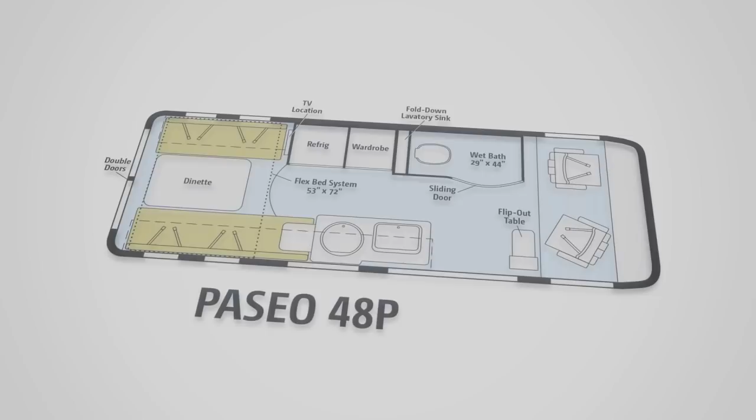Question 1: Will it meet my needs? Seems obvious, right? A motorhome should meet your needs. To make sure that it does, it's important to find a floor plan that works well with the way you'll be using your motorhome. That's why we offer floor plans ranging from ultra-efficient compact coaches to luxurious double-bath diesel pushers and everything in between. Floor plans are like a blueprint for a house, showing key areas including the kitchen, bathroom, bedroom, and living areas.

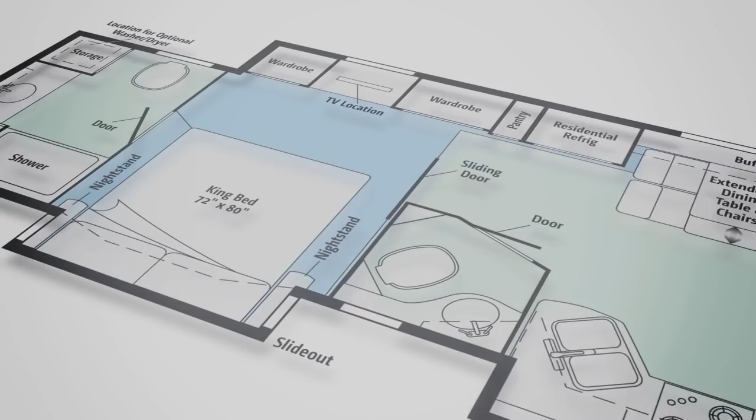When looking at floor plans, it's important to think about storage. Storage makes RVing even more enjoyable, especially when it's easily accessible. For example, a compartment by the entrance door is prime real estate, perfect for lawn chairs, umbrellas, sports equipment, or anything else you use outdoors. Whoever thought of putting the batteries in this particular storage compartment certainly wasn't thinking like an RVer.

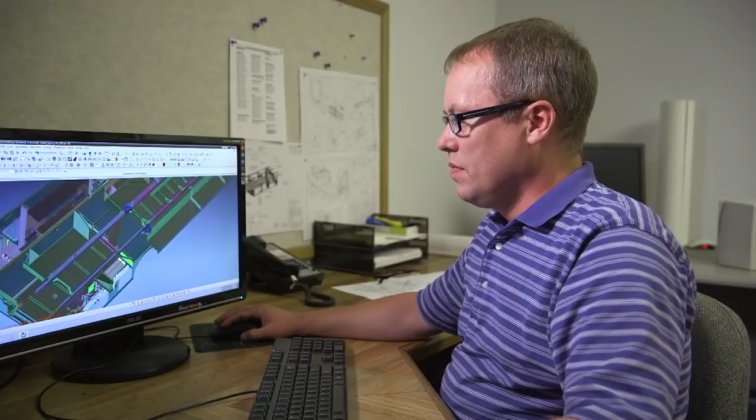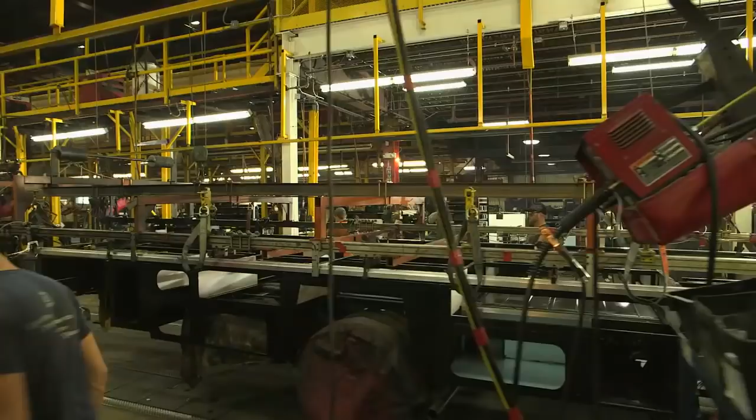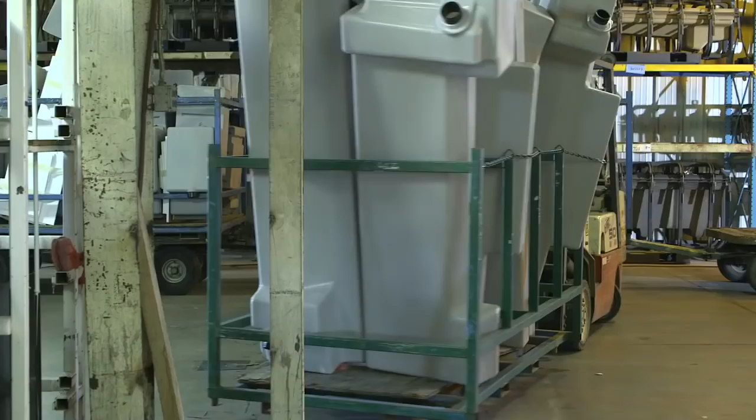There can be big differences in storage even when two coaches are the same size, depending on the engineering and manufacturing skill of the company behind them. Our engineers have real advantages when it comes to conjuring up every last cubic inch of storage in our floor plans. First, we work closely with the best chassis builders in the business to make sure the chassis under our motorhomes deliver the power, strength, durability, safety, and space required for each specific application. Second, we make our own holding tanks, so they fit precisely and free up surrounding space for additional storage. That's impossible with the off-the-shelf rectangular tanks other manufacturers use.

Our engineers also work hard to efficiently package systems and components. They use a state-of-the-art computer-aided design system to ensure a precise fit for all components and reduce wasted space. We call it Smart Space Design, and it's one reason our motorhomes seem to live much bigger than similarly sized competitive units. A sofa arm may actually hold a table, while our pantry opens to reveal vertical storage, then opens again to reveal spacious shelves and drawers. The space we save adds to your living or storage space.

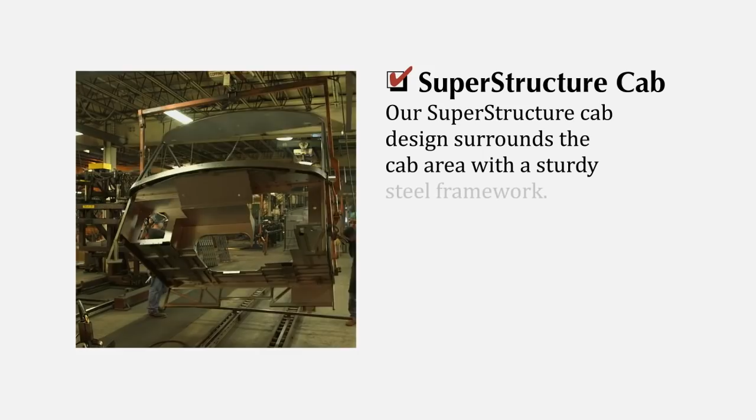When deciding whether a motorhome meets your needs, there's another important factor to consider: safety. Your safety is the number one reason we put so much care into the design and construction of our motorhomes, and why we put them through such extensive testing. In addition to meeting or exceeding all federal and industry standards, our coaches employ a host of other safety features. Our superstructure cab design surrounds the cab area with a sturdy steel framework. We use 3-point safety harnesses in all driver and co-pilot seat applications.

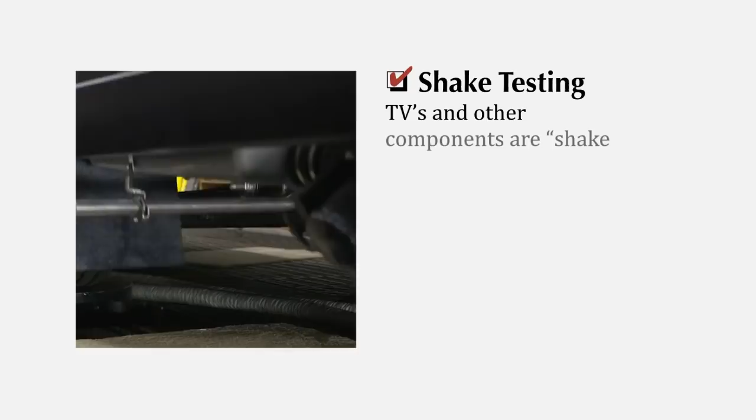Exterior mirror locations are designed to ensure optimal viewing angles. Side view cameras, available on most models, offer added comfort in backing and maneuvering by eliminating blind spots. TVs and other components are shake tested to ensure they and their mounting hardware will stand up to road vibrations. Windshields are installed automotive style with urethane. Forward-facing dinette seats feature child seat tether anchors. Appliances and cabinets are mounted to steel embedded in sidewalls.

So now that you've narrowed down your favorite floor plan, it's time to ask question number 2: Is it built to last? At Winnebago Industries, we've spent more than half a century developing the engineering and manufacturing expertise to produce reliable, durable, quality motorhomes that represent real and lasting value for our owners.

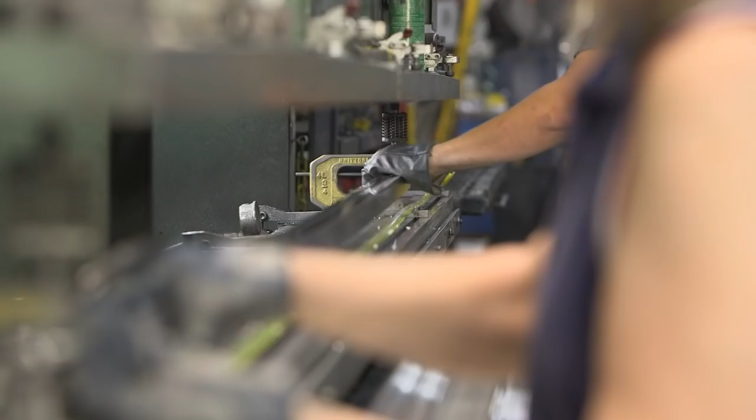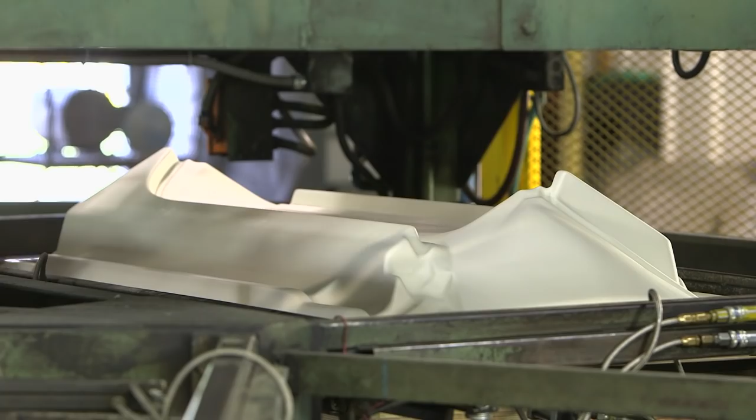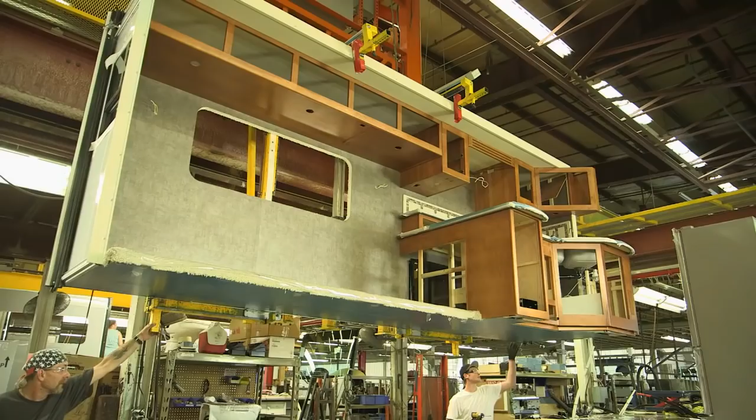Unlike companies that simply assemble their motorhomes from off-the-shelf parts, we build ours start to finish, and we manufacture a large proportion of our own components, so we can control quality, offer part replacement for years to come, and design parts for each specific floor plan. We also use our expertise to create the systems and components that go into a modern motorhome: the structural framework, walls, cabinetry, furniture, electrical and plumbing systems, and more.

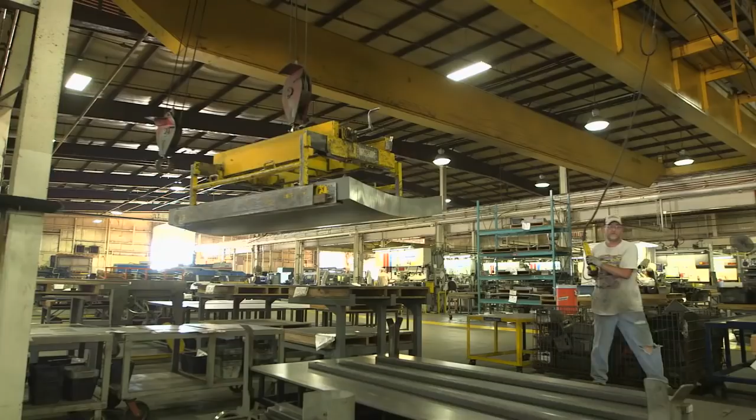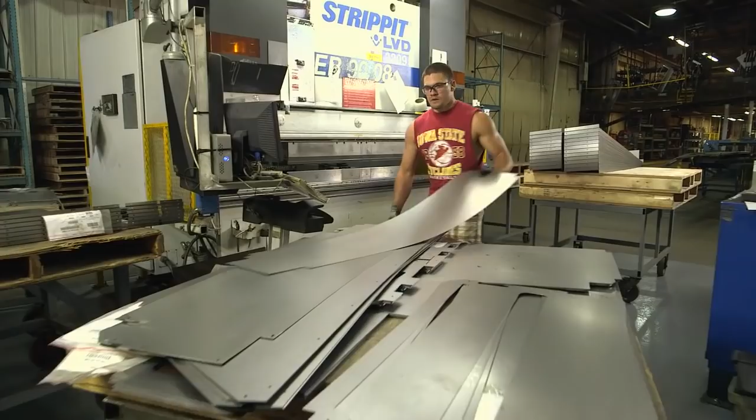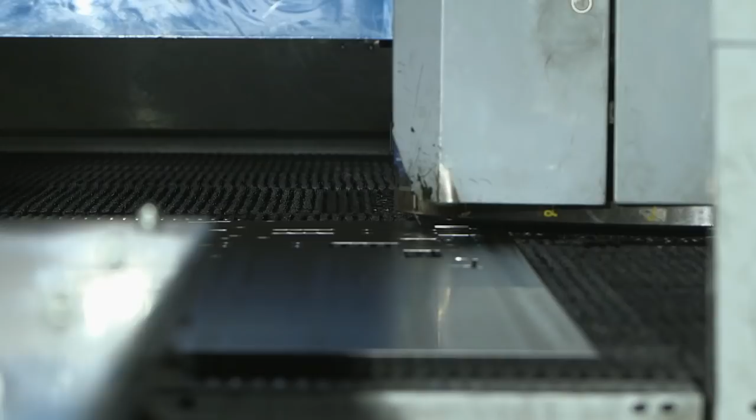Let's start with the framework, and that of course means steel and aluminum. No other manufacturer can match our expertise in manufacturing critical steel and aluminum components. Larger than two full-size football fields, our dedicated steel working facility processes sheet, tube, and roll stock steel. This giant building houses a vast array of computer-controlled equipment, huge machines that manufacture parts to tiny tolerances, precision you just can't get with other methods.

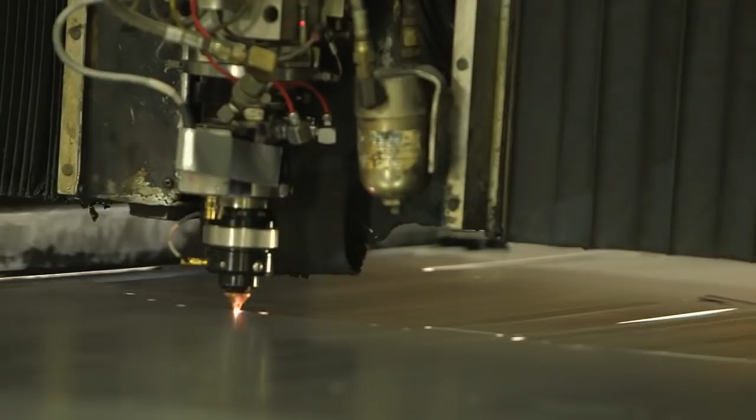We use high-tech lasers, laser tube cutters, turret punching centers, and robotic welders to make precise parts for our motorhomes. Plus, because of the efficiency of these machines, we are able to reduce waste and cost. Ultimately, much of this steel will be cut, shaped, and welded into part of our trademark metal superstructure that surrounds the driver and passenger with steel.

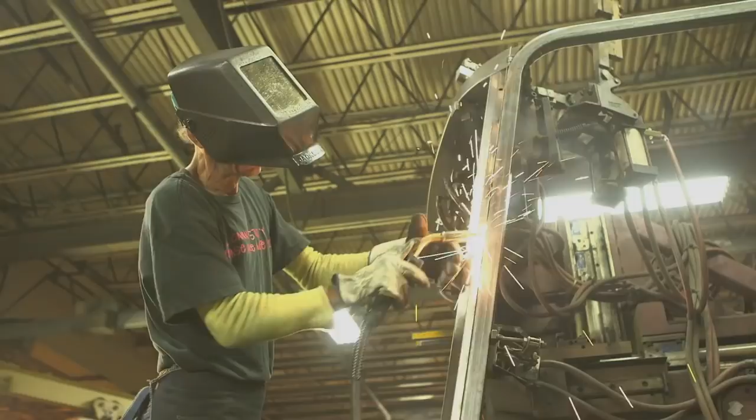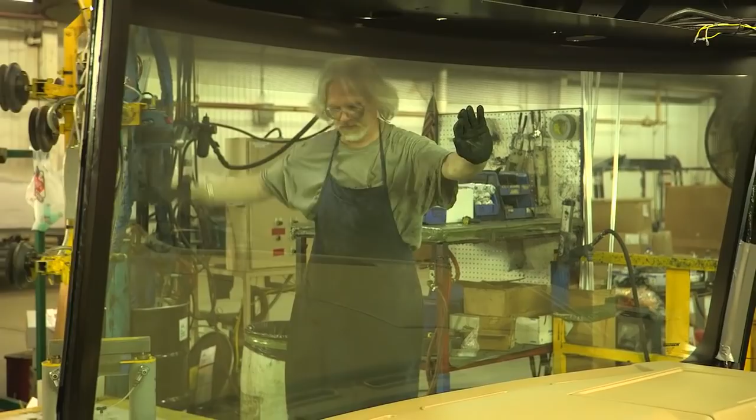Others use a rubber gasket to attach the windshield to the fiberglass front cap. For safety and durability reasons, the rubber gasket was dropped by the auto industry decades ago.

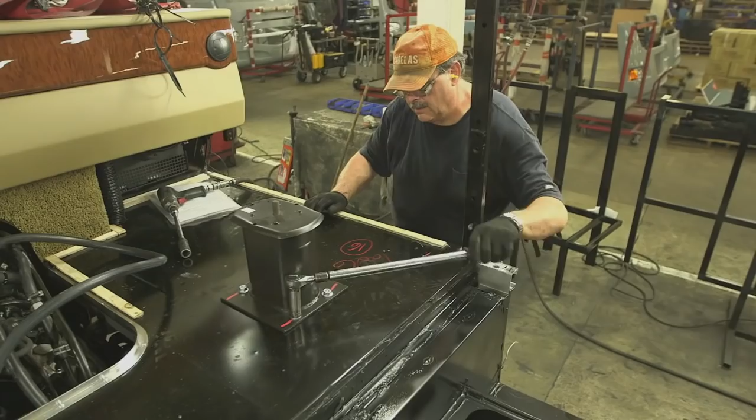Our motorhomes feature a steel firewall between the engine and passenger compartments. And as hard to believe as this is, other companies use wood in this critical application. We also securely bolt our driver and passenger seat pedestals in solid steel, whereas some competitors mount their seat pedestals to a wood cab deck.

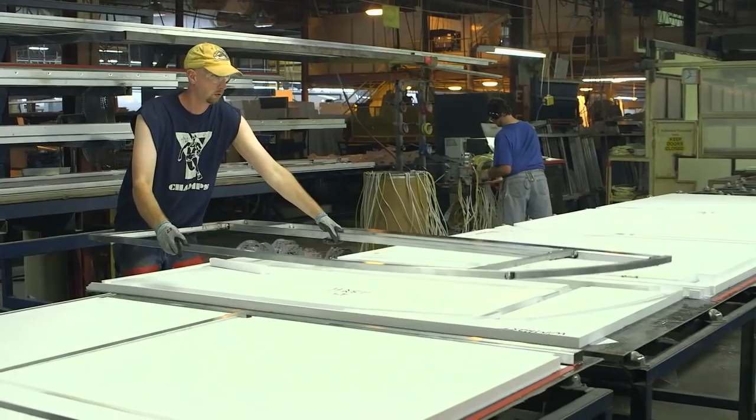Our trademark superstructure includes the aluminum framework embedded in our motorhome walls and roof. And as you can probably guess by now, we don't buy that framework, we build it. Some components are powder-coated.

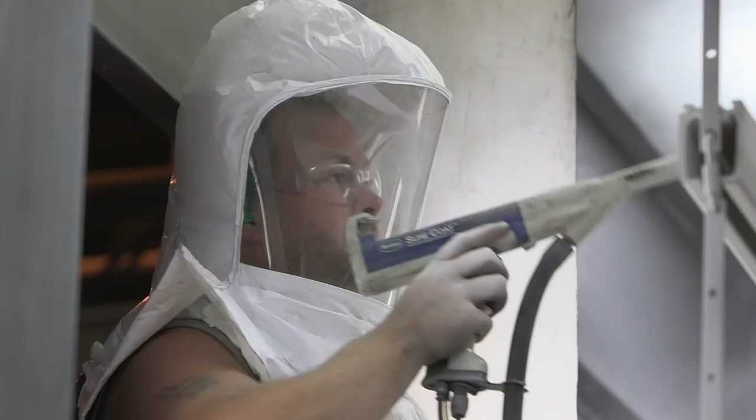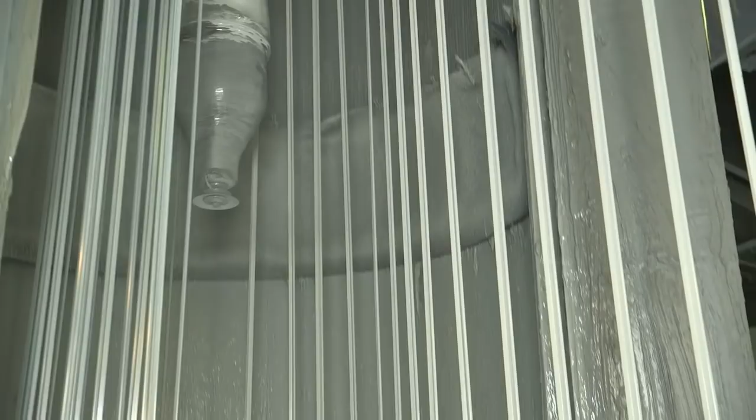Here, a positive electric charge is applied to the part, which attracts the negatively charged powder particles. The coating is then baked on for an attractive, extremely durable finish. Other aluminum parts are sent to our vertical paint system, which applies a heat-treated finish with a revolving spray head to ensure consistent coverage with no sags, runs, or uncoated areas.

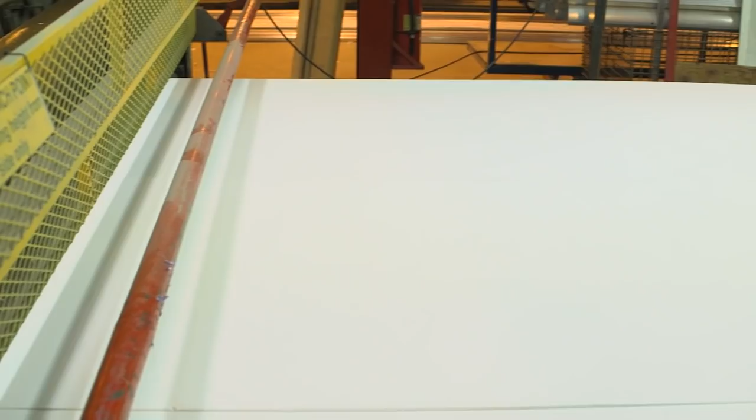The aluminum framework in our walls is a key part of our thermo panel construction, which revolutionized the industry by sandwiching the framework, ducting, and insulation between the interior and exterior walls. Today, we continue to advance our thermo panel technology while others try to copy it.

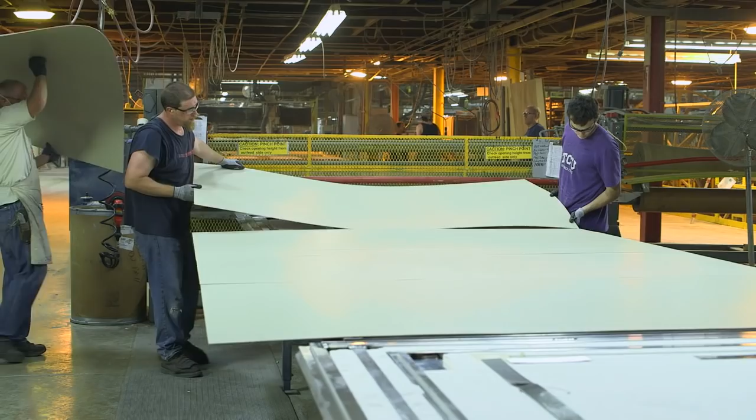Once the wall and roof is built, computer-controlled routers create precise window and door openings, plus channels for the wiring and superstructure. Others use less accurate handheld routers to cut channels, windows, and doors, which can lead to gaps in insulation, weak seals, and poor durability.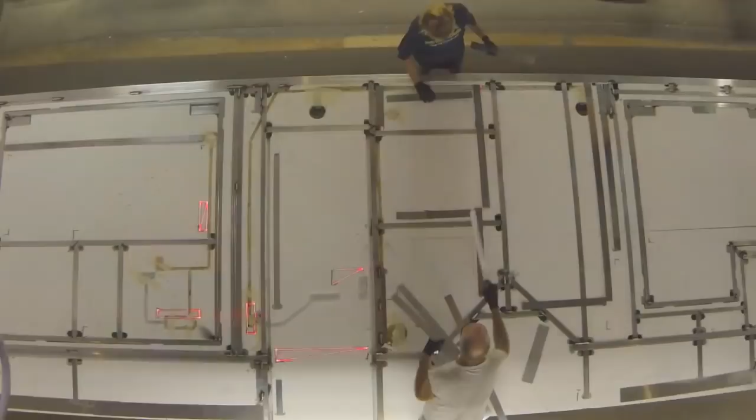Our laser projection system ensures correct alignment and placement of the steel panels mounted in the sidewall to serve as attachment points to securely mount cabinets and appliances. Other manufacturers mount cabinets and appliances to cheap pine wood boards placed inside the sidewalls, or even screw their appliances directly to the sidewall. Which would you rather have? Your cabinets and appliances mounted to steel or mounted to wood?

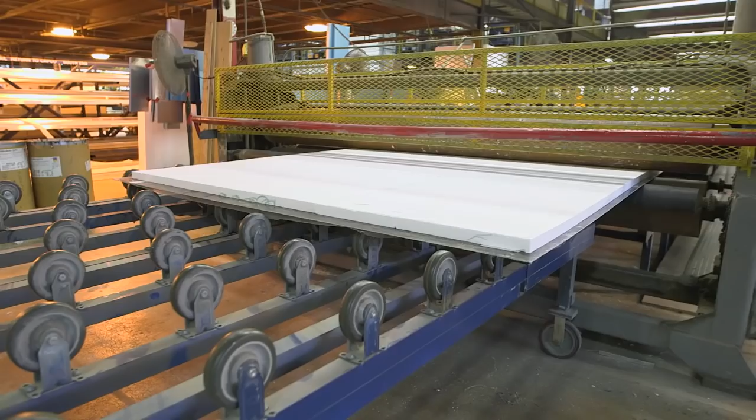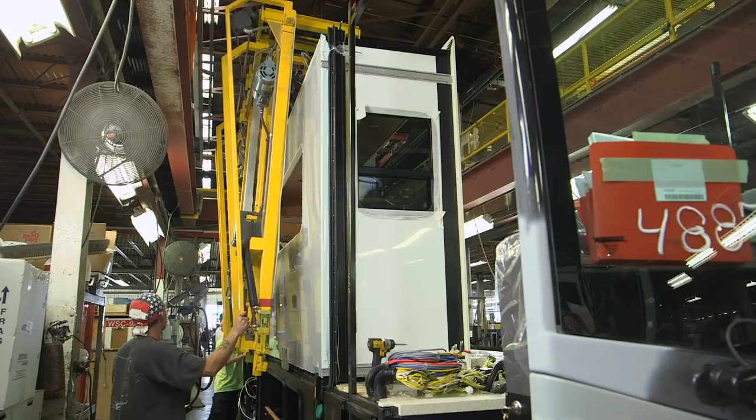We use calibrated pressure rollers and advanced adhesives to combine high-gloss exterior fiberglass, a welded aluminum support structure, high-density foam insulation, and a finished interior wall into lightweight, durable, and incredibly strong sidewalls and roofs. Other manufacturers use cheaper vacuum-powered systems to apply less precise pressure, which results in uneven bonding, reduced durability, and weaker support.

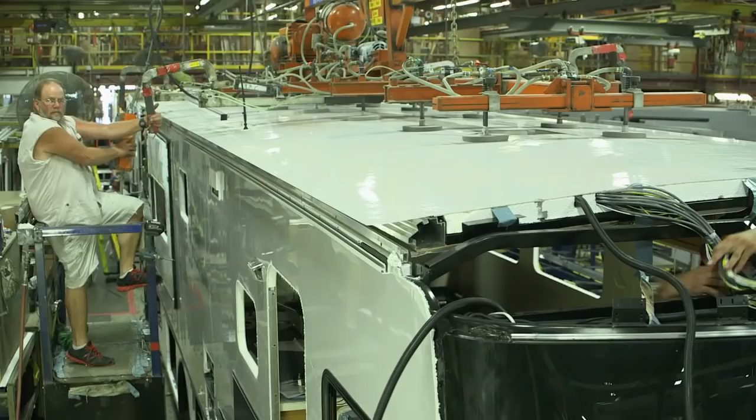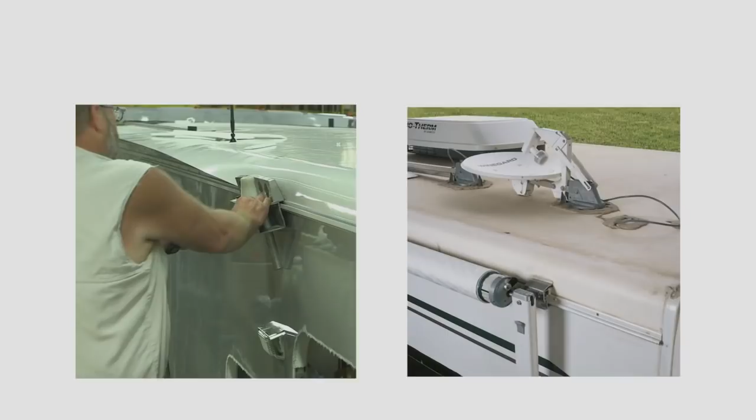To attach the roof to the sidewalls and the sidewalls to the floor, we use a specially designed interlocking joint to evenly distribute the weight along the entire span. That makes our empty shell so strong, it doesn't need internal reinforcement. Other brands simply screw their sidewalls and roof together. But with all the weight borne only by those screws, the resulting structure is so weak it requires interior walls and cabinets for stability. Which do you think holds up better over the long haul?

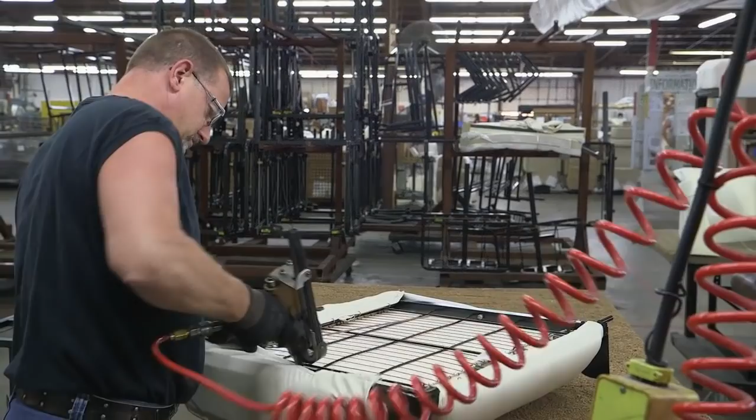Now that the walls and roof are on, let's talk about what goes in, on, and around them, starting with furniture and cabinetry. Unlike residential furniture, motorhome furniture must meet a unique set of automotive fire, crash, and other safety standards. And no one knows more about motorhome furniture than Winnebago Industries. Since our founding, the craftsmen in our Stitchcraft division have produced more than 1 million pieces of furniture, including seats, sofas, and loungers.

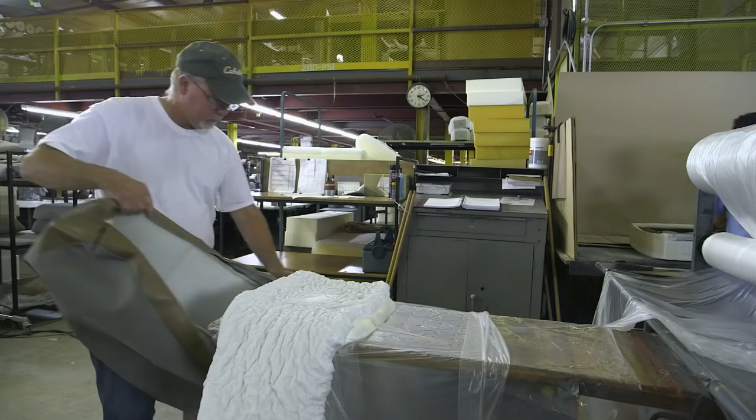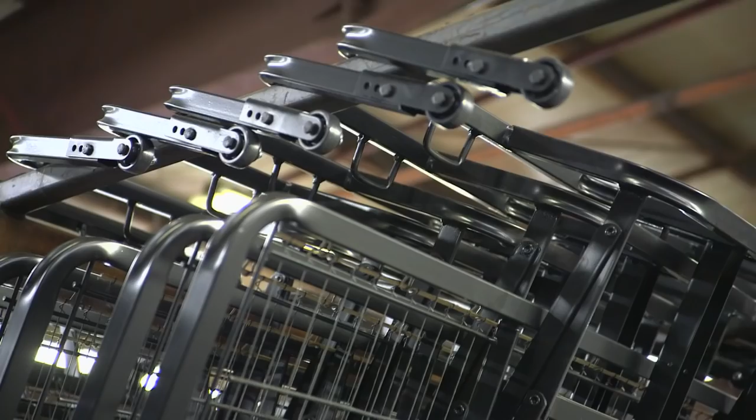Like the other components we build ourselves, manufacturing our own furniture allows us to provide replacement parts long after the original date of manufacture, something that third-party vendors typically can't match. We also don't cut corners when it comes to what goes into our furniture.

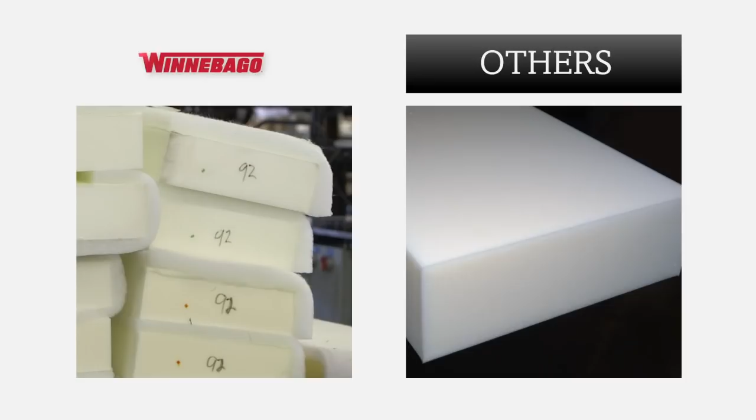Like every other component, Stitchcraft furniture must pass our rigorous quality standards before being sent to the assembly line. And we use multi-density foam construction, combining different density foams to provide the perfect balance of strength and softness to maximize comfort and durability. Some manufacturers use single-density foam that is less comfortable and prone to break down, causing lumps or permanent impressions.

Our beautiful Stitchcraft furniture is complemented by fine hardwood cabinets, created by our own skilled artisans. These custom hardwood cabinets feature beautiful and durable construction, similar to that found in fine residential cabinetry. Our cabinets are finished with hand-rubbed stains and durable catalyzed finishes to bring out the natural beauty of the wood.

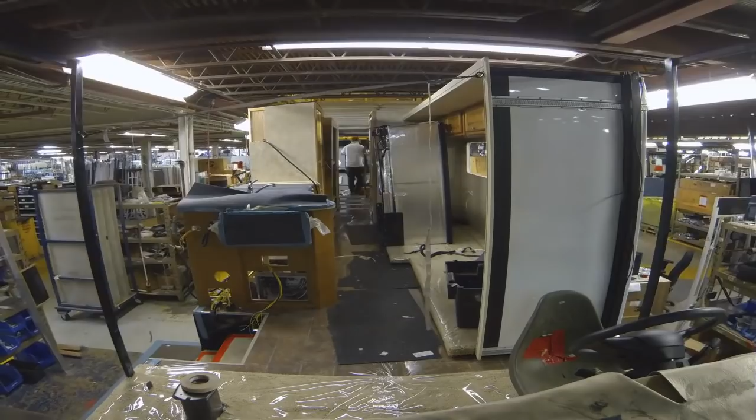Did you know we also manufacture many other components found in your motorhome? We do. For example, we make water tanks, luggage compartments, heat ducts, and wheel wells here in our Rotocast facility. Here's how we do it.

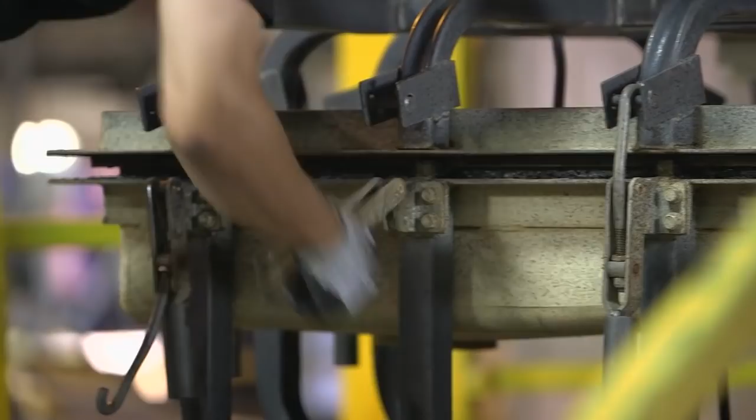First, polyethylene powder is placed into specially shaped molds, which are then heated, changing the powder to liquid. The liquid is then rotated in the mold, so it's evenly distributed. Finally, it's cooled to produce the hardened, seamless parts.

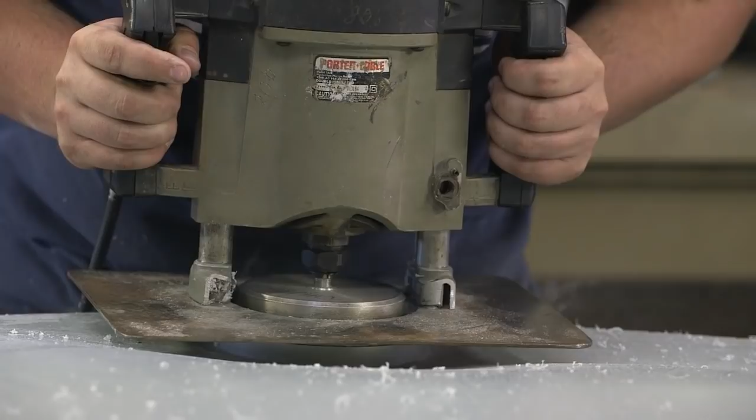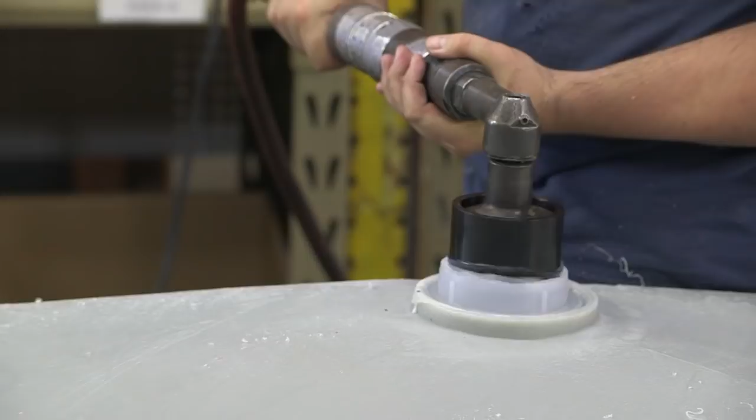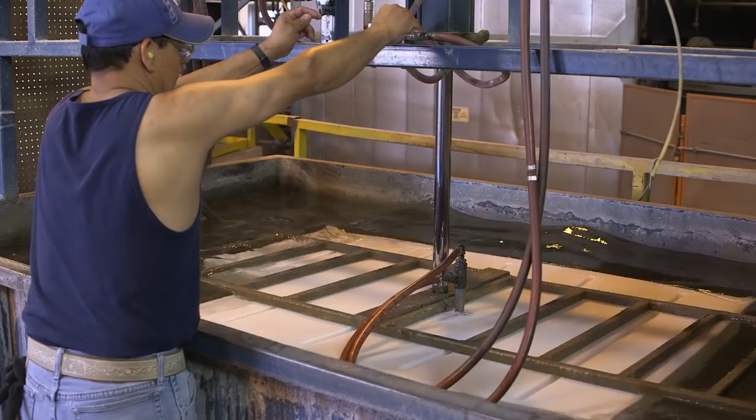We then use a spin weld process to literally fuse fittings to our water tanks at a molecular level, so they actually become part of the tank. Wastewater tank drain fittings are threaded and sealed to create a strong and durable connection. Others use silicone sealant to glue their fittings on, which results in a fitting that is more likely to leak or work loose. As an added step, every water tank is pressurized and immersed in a water bath to ensure there are no leaks.

We produce more than 3.5 million pounds of Rotocast components every year, each designed to precisely fit its specific application. And because we own the molds, you can be sure parts will be available for years to come.

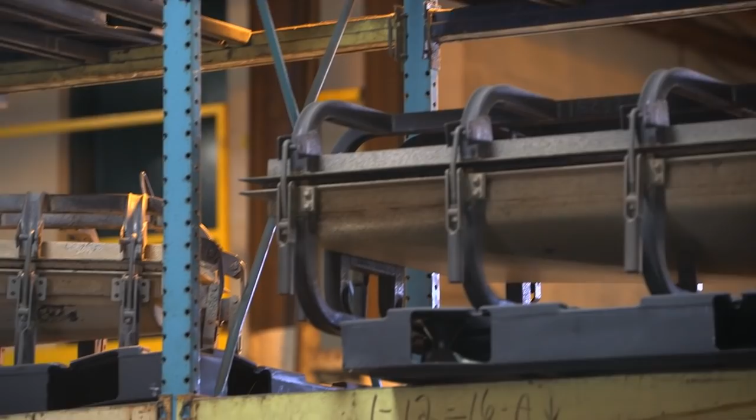We also build components like shower stalls, dashes, bumpers, trim pieces, and compartment doors in our 72,000 square foot plastics facility. We start with high-impact ABS plastic that can stand up to the rigors of life on the road.

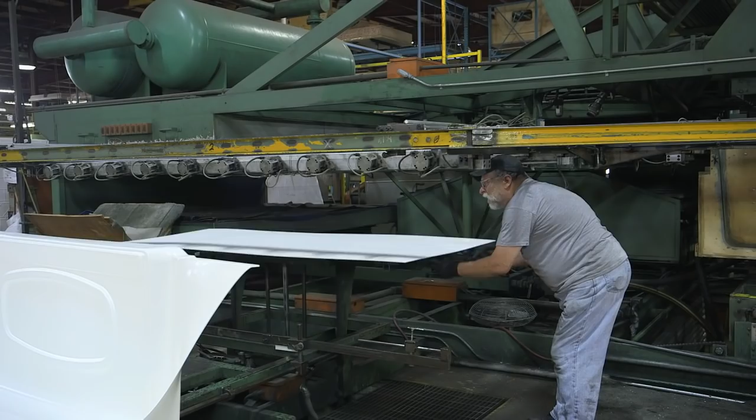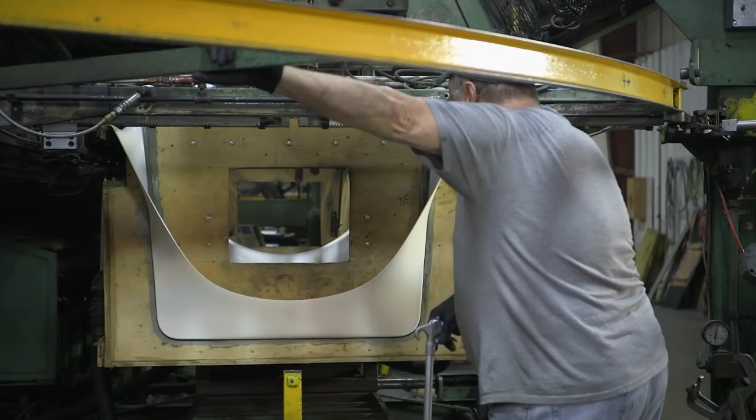Our thermoforming machines heat the plastic sheets and place them on molds while applying a vacuum to shape the part. Once cooled, the formed part is trimmed to exact tolerances. Other manufacturers use low-grade and less expensive styrene material that's less impact-resistant than ABS plastic and trimmed by hand to less precise tolerances.

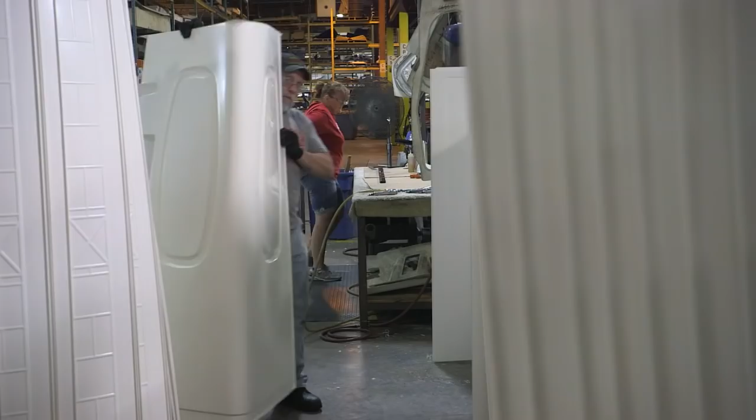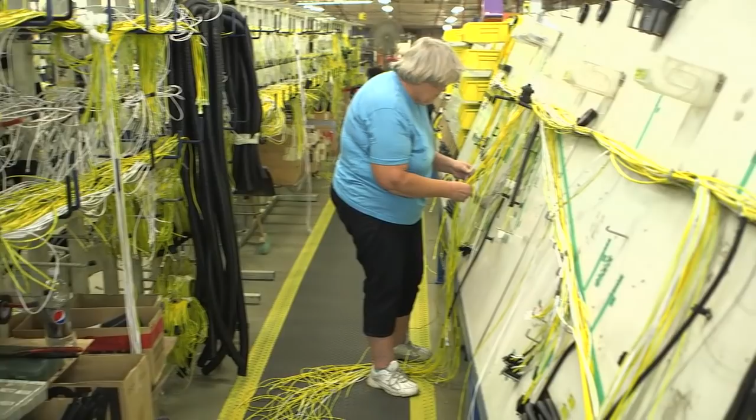We bring this same expertise and attention to detail to the plumbing and electrical systems of your coach. For example, we follow automotive standards for our 12-volt wiring to ensure secure, reliable connections. Wires are clearly labeled for easy identification and crimped and spliced using an advanced solderless welding process and heat shrink covering that virtually eliminates failure.

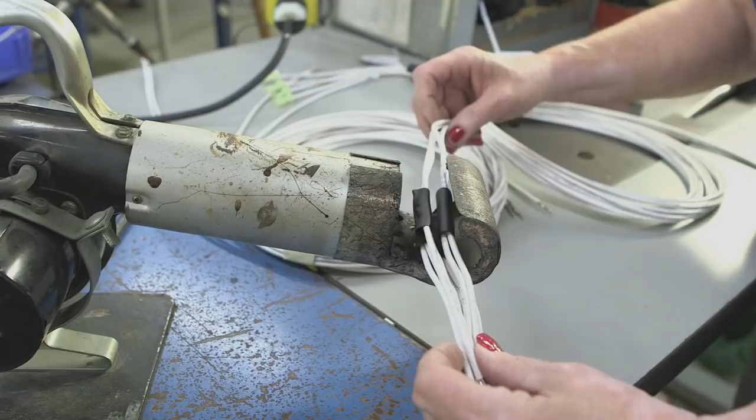Others use twist-on wire nuts or simple butt connectors, which are more prone to failure. They also don't label or even color code their wiring, making troubleshooting or repair more difficult and expensive.

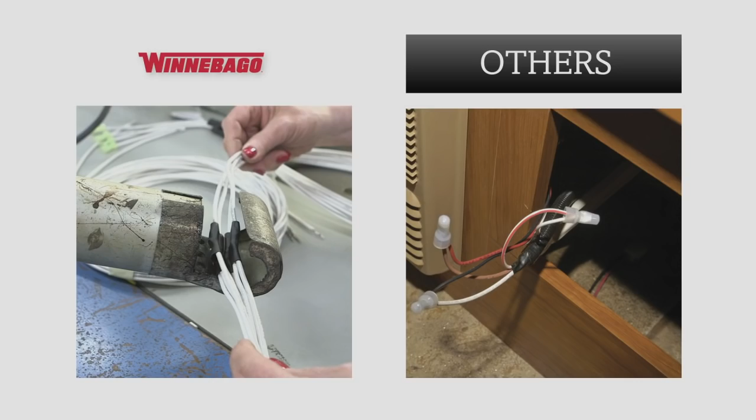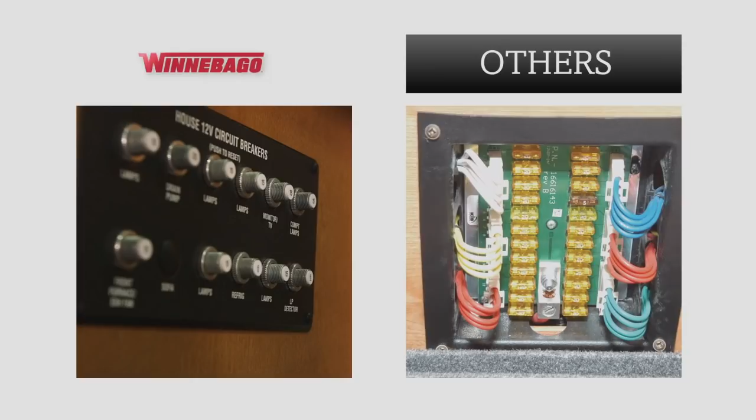Whenever possible, we use resettable breakers for 12-volt circuit protection. They cost a bit more, but since they don't use fuses, they end up being far more convenient for you. Others use cheaper inline fuses that must be replaced when blown.

And we use residential quality PEX tubing in all of our water supply systems. Crimp fittings at key locations ensure sturdy, leak-proof connections.

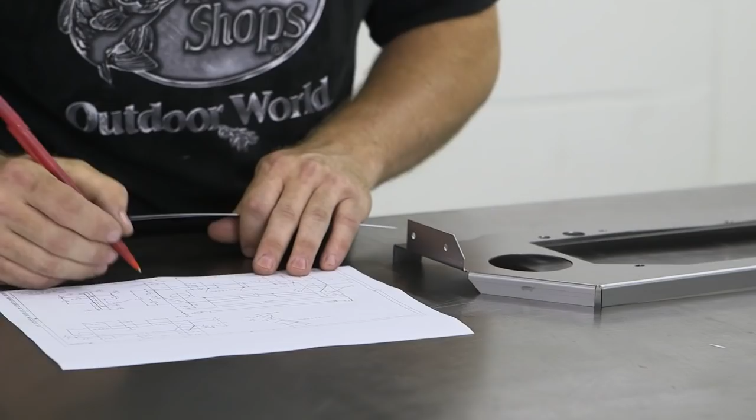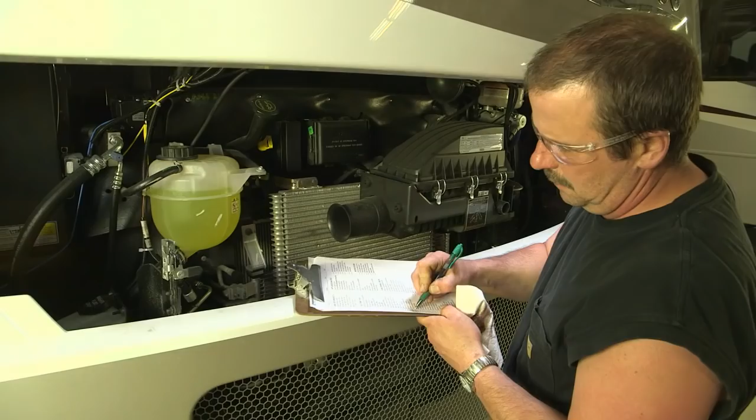Now that you've seen how we build our motorhomes, let's take a look at how we put them to the test. We test raw materials when they come in. We test prototypes. We test finished parts. We test completed motorhomes. All to ensure that every motorhome that rolls out the door meets our standards for quality, performance, durability, and safety.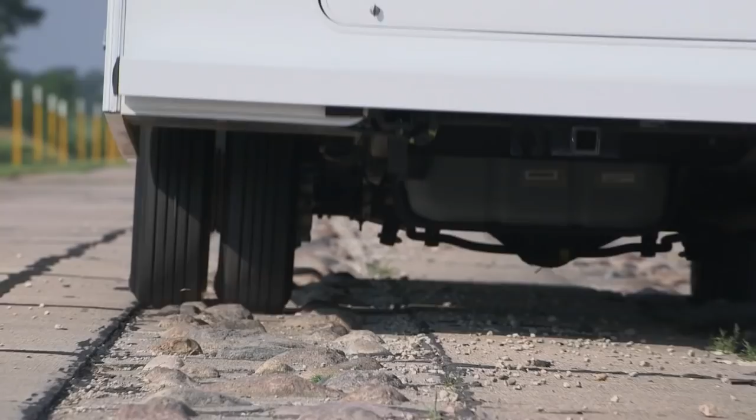We may be the only motorhome manufacturer with our own proprietary test track. And while we'd never wish a trip like this on anyone, with a 30% grade, 6-inch bumps, and 4-inch chuck holes, among other hazards, it's good to know your motorhome is built to take everything this scientifically designed nightmare can dish out. And every prototype, whether a part or a complete motorhome, is thoroughly tested before it's put into production.

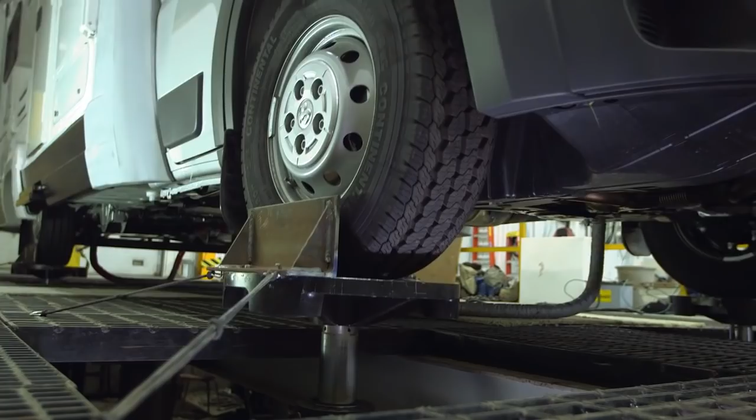Here, our custom shaker machine puts a coach through the equivalent of 40,000 road miles in 1 week. We also test to assure paint and finishes will stand up over time with our gravelometer test, check corrosion protection in our salt spray chamber, and test heating and cooling systems in our hot room.

Prior to ship out, every motorhome undergoes a high-pressure water test to check for potential leaks. 250 spray heads deliver a powerful concentrated spray at a rate equal to 50 inches of rainfall per hour. At some other companies, the water test consists of a sprinkler on a garden hose.

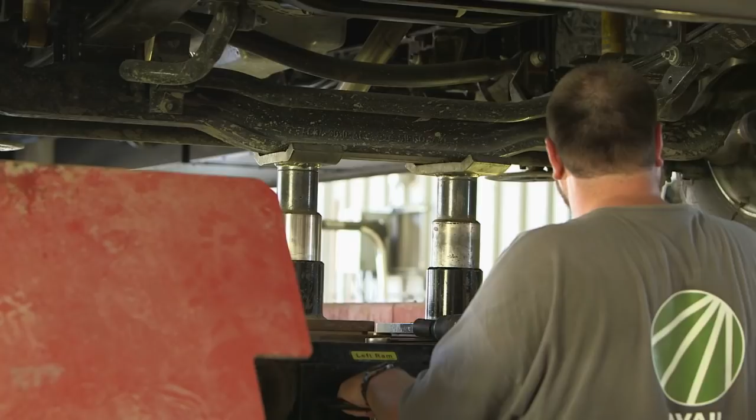Seriously? So now that you've seen how we build and test our motorhomes, it's time to answer question 3: what happens down the road?

We believe the more you know about your motorhome, the more you'll enjoy it. So we provide a comprehensive operator's manual that features key safety, operating, and service information, along with helpful photos and illustrations. We also include a custom printed supplement with information and operating instructions for the components and accessories in your specific coach, everything from your refrigerator to your water pump. The supplement is cross-referenced to your operator's manual, making it easy to find exactly the information you need. We're the only manufacturer in the RV industry that organizes and prints this information specifically for your coach.

It's also good to know that every Winnebago Industries motorhome is backed by a strong dealer network that has stood the test of time. We support our U.S. and Canadian dealers with comprehensive training, information, tools, and programs they need to keep your motorhome ready for your next adventure. Our chassis partners also support your motorhome with hundreds of servicing dealers across the U.S. and Canada. Every dealer's parts department has access to the most advanced parts supply systems in the industry, including online directories, electronic ordering, expedited delivery, and a factory staff of experts located in our main parts warehouse. At 400,000 square feet, our warehouse is the largest building in our Forest City complex, well over 8 football fields under one roof, and processes between $3.5 to $4 million in parts each week.